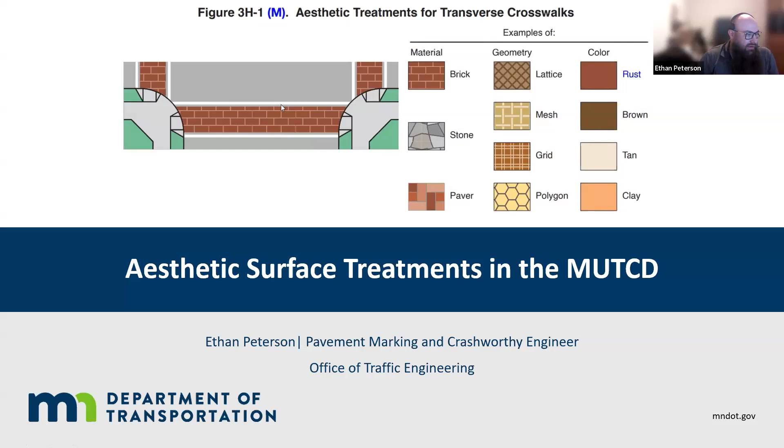So right away, what are the definitions? Before we talk about anything, we should really know what it means, right? So what are the key definitions of the core philosophy here?

Really, the big thing that kicked us all off was colored pavement. Colored pavement kind of brought up this sense of aesthetic surface treatment earlier on, but it is a completely different thing. Colored pavement is a road paving material, paint, or surface treatment used to communicate regulations, warning, or guidance, or that incorporates retroreflectivity. So the key difference here is that it's used as a traffic control device.

And then the aesthetic surface treatment - what are these? These are treatments like brick, pavers, or patterns used for purely aesthetic reasons that are not intended to communicate with road users. So the big thing here is it is not a traffic control device.

The core philosophy, consistent across both the old MUTCD and the new one, is that any color or pattern that functions as a traffic control device must comply with MUTCD standards, and aesthetic surface treatments are allowed only if they do not interfere with, degrade the contrast of, or obscure official traffic control devices. That's a really big theme you'll see as we go here.

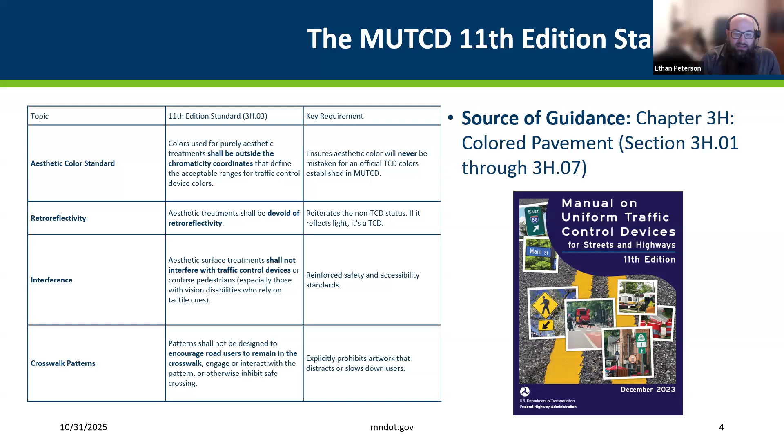So that's kind of the guidelines for that. How do we move forward with all of this? That's the really big thing, right?

As Lisa alluded to, MnDOT is working on a technical memorandum right now to address policy for MnDOT roadways on how aesthetic surface treatments can be used, and defining the process for how that would work. We're aiming to have that finished by early to mid next year. I think we're almost there—we just need to get it through the tech memo process, which could take some time. Hopefully we can get through that quickly, and then get it to this group and disseminate it amongst everything.

I didn't want to bring too much up because there's a lot to it, but I will say it's going to be pretty restrictive. Like this last bullet says, we're not going to allow aesthetic surface treatments on MnDOT roadways in crosswalks. We're really concerned about the interaction with people who have visual disabilities, because contrast is a huge thing for them, and there's a large percentage of the population that suffers from some version of visual disability. So we're driving a research project to look at this more closely, and Nicole Morris will dive into that later.

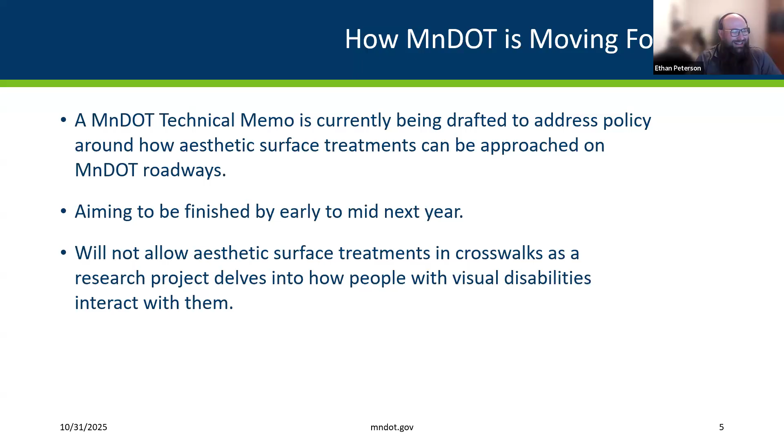So this cues things up for the future, or for these next presentations. And with that, I want to say thank you, and see if anybody has—I think we're going to take questions afterwards if there were quick technical brush-ups.

Seeing, hearing none, I guess I'll give it to Chris.

All right, thank you, Ethan, and thank you for the chance to be here today. Again, my name is Chris Sagsveen. I'm a project director and engineer at SRF Consulting in the safety and research group. A lot of my work involves delving into Local Road Research Board activities.

So today, some of the talking points: I'll give a quick overview of the Local Road Research Board, or LRRB, for those who don't know exactly what it is. Then the project overview of this particular project—there is a report that's done, but not yet published, we're just finalizing that now. For today's purposes, I'm going to focus on the frequently asked questions portion of the report and key themes and takeaways.

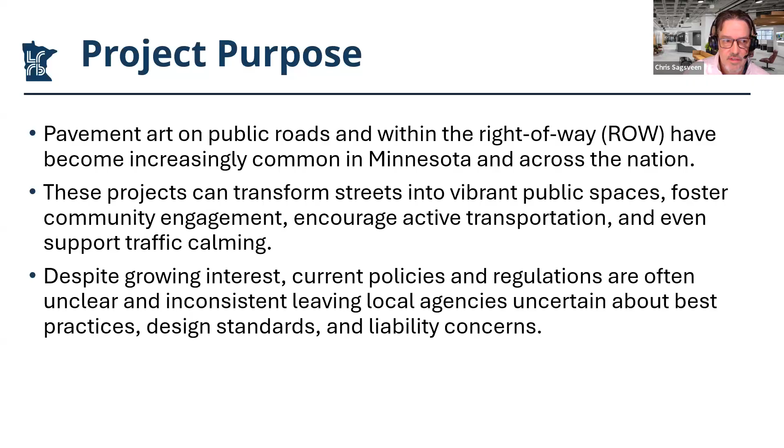To address these gaps in understanding, we assembled a team of experts to help us do the following: we reviewed and synthesized best practices for pavement art in the right-of-way, we analyzed existing policies and technical guidance that we were able to find, such as the MUTCD, we surveyed local agencies across the state and across the nation to see who's doing what, and finally we brought everything together in a report that will probably be ready fairly soon for your view. So today's just about giving an overview of what's in that report.

The technical advisory panel was a pretty good cross section of people across the state here. Randy Newton was the chair from St. Paul, and Ethan Peterson, who you just heard from, and Lisa Austin were both part of the team. We're very thankful for the time they put into helping us address the questions and how we wanted to tackle this.

Let's move into project deliverables. I wanted to touch on the FAQs and the key themes and takeaways. To begin with, what are we talking about? What did this project focus on? It really was about pavement art on public roads, and that was the focus.

Specifically, painted artwork maybe applied by an artist directly to the roadway surfaces, such as within intersections, mid-block areas, and bump outs. The definition for our purposes did not include artwork on vertical elements, such as bridge abutments or retaining walls, or other right-of-way elements outside of the roadway.

Are there state or federal rules or regulations to guide agencies on implementation of art? There are no specific state or federal guidelines or regulations that prohibit pavement art, but there are some important guidelines to consider. First, the MUTCD, which you already heard a little bit about from Ethan, is the main one. It governs traffic control devices such as pavement markings. It does not directly regulate pavement art, but it sets boundaries that agencies must follow. Because it can be interpreted as a traffic control device and needs to conform to MUTCD standards for colors and shapes and so on, it's really important to seek the source and look at that information in Part 3 of the MUTCD.

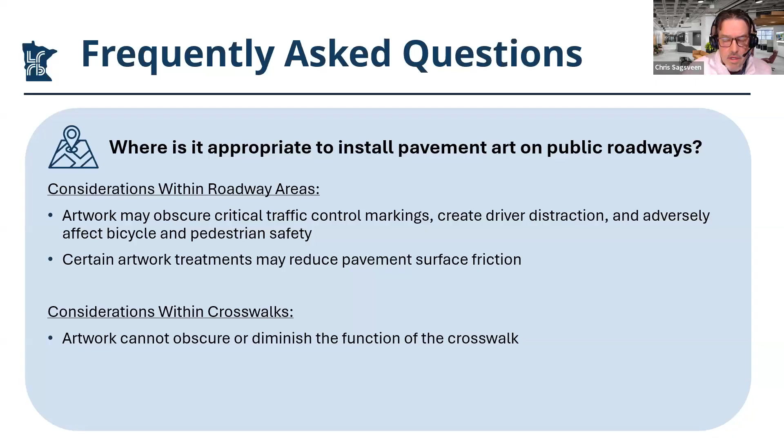How long do pavement art installations last? This is going to depend on whether it's temporary or permanent. There are some examples like Chalk Fest in Maple Grove, Minnesota, which is really only there for a weekend. Others are much more permanent.

What steps should be considered for an agency to implement art in a roadway? In the report, we've provided some common steps or considerations, really considering whether you want to actively participate with organizations installing artwork, or whether you want to regulate it through a permit program. So we give a little bit of a range in there.

And then, are there examples of model policies or programs? We have about 9 examples in our report, across Minnesota and the nation, so you can easily look in there to see how it relates to your condition. With regard to environmental impacts, there's a small section that touches on things we're familiar with, such as paint wash-off and anything that might get into the storm system.

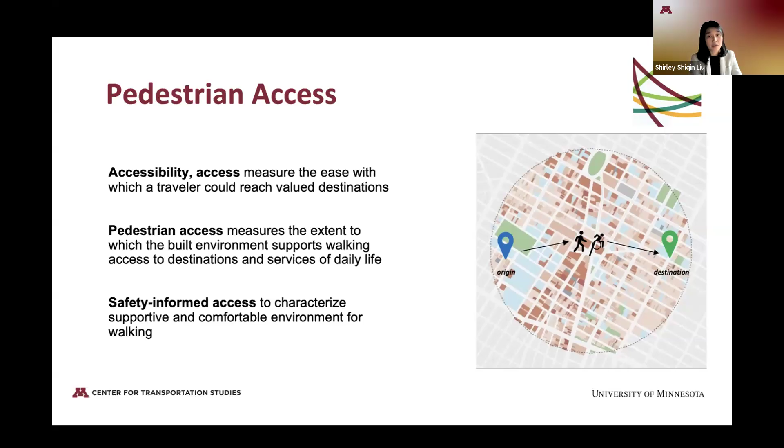It is a broad concept and can mean different things in different contexts. In our work at Accessibility Observatory, we work within the multimodal transport access framework. So it's about how easily people can reach places they value. It can be measured as a form of travel time from origin to destinations. When we focus on walking, we look at pedestrian access, which measures the extent to which the built environment supports walking access to destinations and services of daily life. For example, in Accessibility Observatory we calculate walking access to jobs annually in our National Accessibility Evaluation Project.

This map I'm showing here is the Met Council region profile. Overall, this access measure, in terms of walking access to jobs, can reflect population and economic activity centers, which tend to cluster at the city center. But this map shows we measure walking as if all streets are equally accessible for people to walk on. But we also know this is not true. Not all streets are created equal.

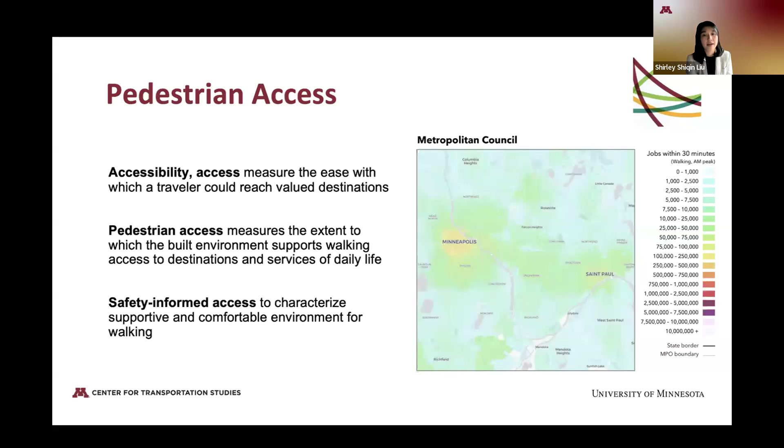So our goal is that we want to take a step forward to do more safety-informed access measurement, to better characterize a supportive and comfortable environment for walking.

To advance this conversation, we land on the concept of level traffic stress, which is a framework for evaluating how comfortable and safe pedestrians and bicyclists feel when traveling along roadways and crossing intersections with existing facilities and traffic conditions. This concept was first developed and studied by an engineering professor to capture the bicycle level traffic stress for cyclists when traveling along streets. It is a pretty mature concept and gained popularity in the last decade for planning communities. In recent years, the concept has been borrowed to describe the level traffic stress for pedestrians, which is our primary focus for today's topic.

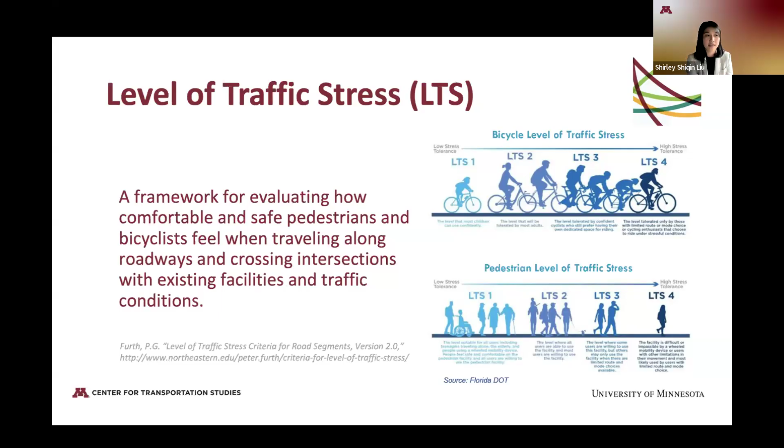So what is pedestrian level traffic stress, or PLTS? It is a simple scoring system from 1 to 4. PLTS 1 represents streets that feel safe and comfortable for everyone, even little kids or older adults, to walk on. But as stress level rises, walking becomes less safe and comfortable, and probably requires more vigilance to surrounding traffic. PLTS 4 is high stress, meaning it is uncomfortable and unsafe for most users, and most people might simply avoid walking altogether.

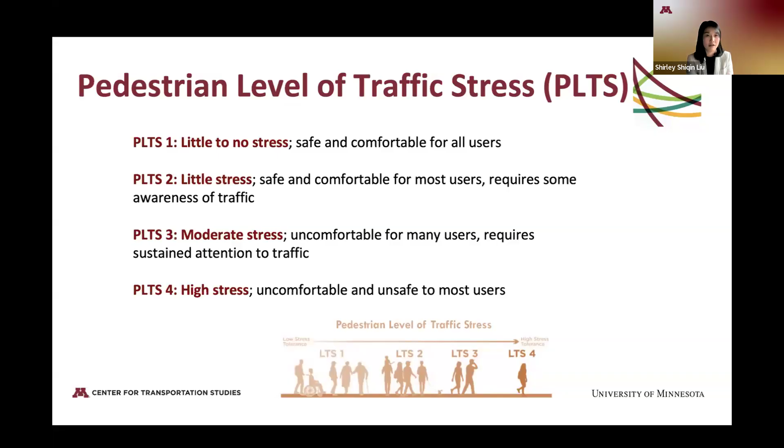So what type of roadway design or feature could impact PLTS? In 2024, the Center for Pedestrian and Bicyclist Safety published a report about a standardized approach to describe pedestrian level traffic stress at the street segments and crossing level.

PLTS is influenced by many street design features and traffic factors. For example, for walking along a street segment, speed, traffic volume, or the presence and width of the sidewalk could matter the most. For crossing experience, it's about the speed, the presence of signals, and other traffic control or calming systems.

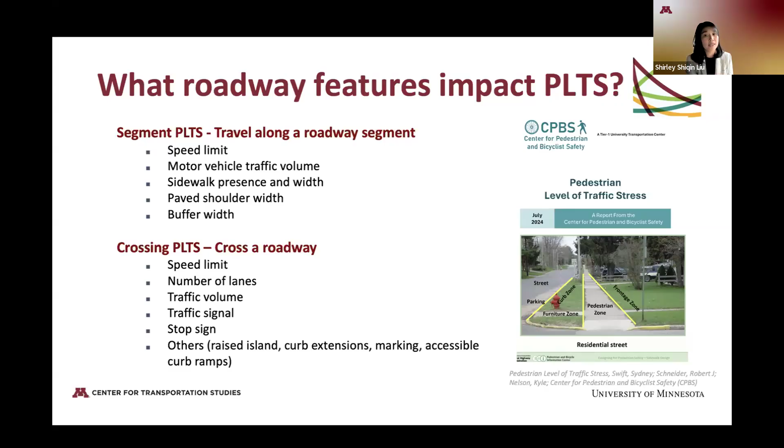Also, how many lanes people are crossing and other safety features like pavement, curb extension, or crossing island, for example. So these are all the details that shape whether a street can make people feel comfortable or intimidating to walk on.

So one key question we face is: do we actually have the data ready to measure pedestrian comfort or stress at this level? The data I mean is all the relevant spatial features or traffic factors that we just talked about that impact the pedestrian experience.

I guess the short answer is no. Throughout our investigation, it's surprisingly rare to find well-maintained or consistent data for pedestrian infrastructure. So even if it exists at the local level, it's on a much smaller scale within the jurisdiction or particular corridors, and the detailed elements we need for describing and capturing the pedestrian experience are not enough.

For example, we simply cannot find any local network data with sidewalk or buffer width attributes, without doing specific field work. Also, for measuring access to destination, which is our work's focus, we need a well-connected street network for routing analysis. These are all important challenges we encounter as we try to quantify stress levels and access evaluations.

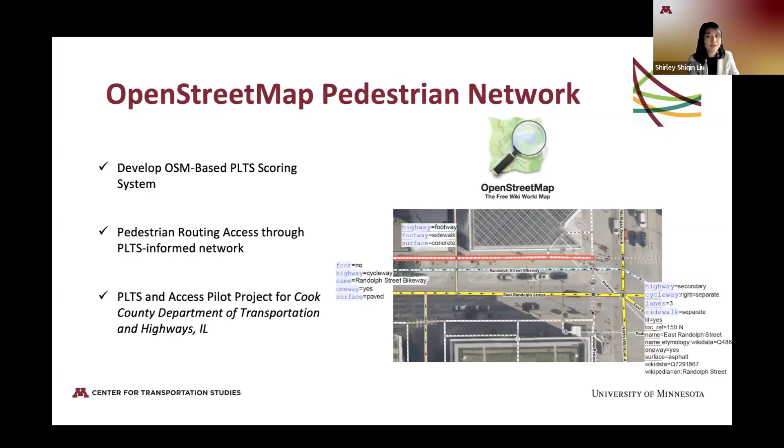So this is a pilot project. We partner with Cook County DOT in Illinois, which is home to the City of Chicago. We are able to show an example of how we can translate this data into a meaningful planning tool to inform pedestrian planning.

So building within the scope of the OpenStreetMap data, we can characterize streets into different stress level profiles. But not every road is suitable for walking, so defining a non-walkable roadway might seem intuitive, but it's actually not as straightforward from the data standpoint.

But for our analysis, for example, we typically exclude roads where pedestrians aren't allowed, like expressways, or roads where access is private or doesn't serve pedestrian routing purposes specifically. This step ensures that our PLTS network only reflects realistic walking routes.

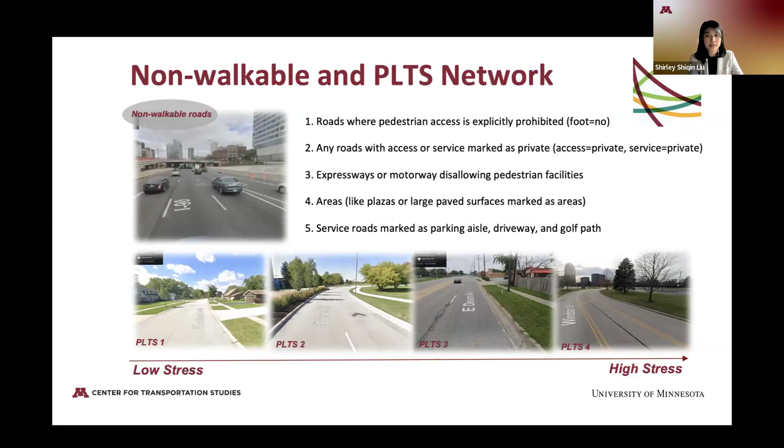In the next couple slides, I'll show a couple examples of street profiles at different stress levels to give you a sense of what they look like. First, for the sidewalk segment: the basic street level features we use to describe PLTS include sidewalk presence, buffer, speed limit, number of lanes, and roadway types.

So let's take a look at an example of what low stress streets look like. First is an example of a typical residential street with sidewalks along low speed roads, which may look like a neighborhood street that you live on. They are typically safe and comfortable to walk on.

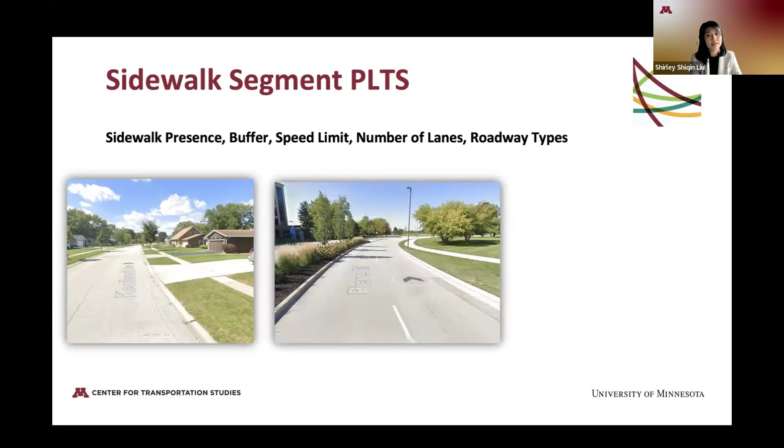The second street here has sidewalks along a relatively low speed and low traffic roadway, which we categorize as low stress, or PLTS level 2, even though it's a little higher speed compared to residential streets.

Another example is a sidewalk segment along a medium speed, 2-lane arterial road. It is not very comfortable for people to walk on, and this type of street we typically categorize as PLTS 3, medium stress.

All three examples reflect the fact that pedestrian experience on sidewalks is highly impacted by the adjacent traffic roadway, and we are able to take those into account when doing this PLTS categorization for streets.

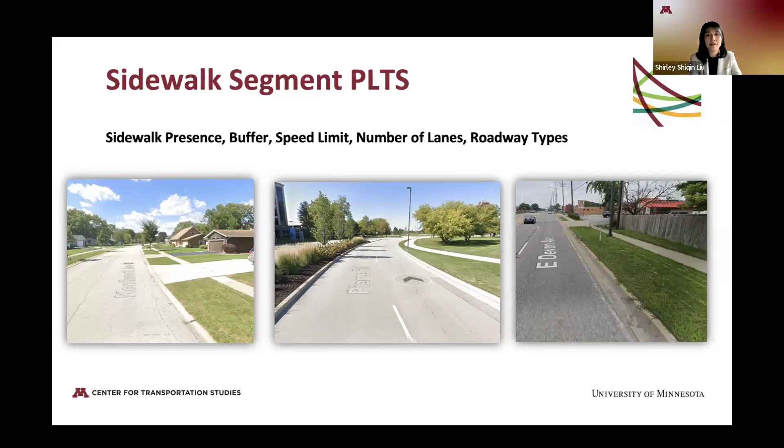Next we're going to look at crossings. The factors we consider for PLTS include any kind of traffic control system, like whether there are traffic signals or stop signs, and traffic calming applications including crossing markings, curbs, islands, or raised crosswalks.

The first example is a pretty intuitive low stress crossing environment: it's on a low stress residential street, with stop signs and really nice crosswalk pavement and markings.

The other example reflects more of a medium stress crossing. It is signalized, but with more than 5 lanes of traffic road.

Note that we have not included pavement or aesthetic art application as an attribute for level of traffic stress, partly because of the data. But as I heard in Ethan's and Chris's presentations, I think a synergy we could explore is where is the good place to install pavement art in a crossing, and how pavement art will interact with existing crossing attributes and PLTS level. Does it make sense to install art at already high stress locations, and will it become a form of distraction, or will it help ease traffic in some areas, or crossings with or without traffic signals?

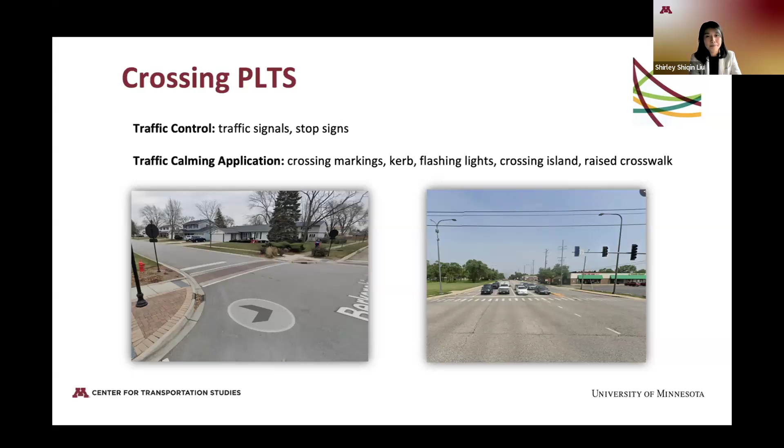Looking back to our big picture, our work is developing a generalizable method, working with relatively consistent data to characterize low and high stress streets for every street network in different places. We developed these methods with support from the Cook County DOT.

This map shows the PLTS network profile for part of the City of Chicago. The green corridors reflect the low stress network, while red highlights the high stress streets. These stress streets can become a barrier for access because people typically reluctant to, or may try to avoid entirely, walking on those high stress streets.

For example, if those corridors or streets are important connections to many essential destinations, then this may become a problem, because many people may have to walk on those stressful streets to get to their destination. Then there would be safety and economic development concerns. This type of analysis will help.

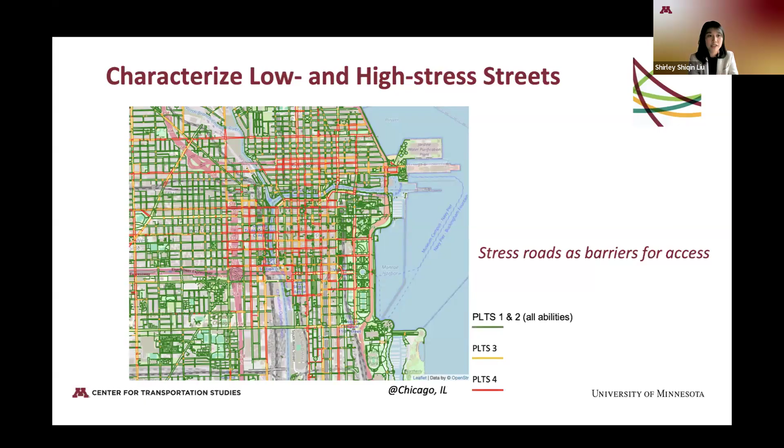Using the PLTS and access framework, the goal of Cook County, our long-term partner, is to be able to use this type of analysis and tool to help identify locations that are high stress and to prioritize infrastructure improvement. It also provides a way to evaluate accessibility before and after interventions.

This measure can fit into performance management for pedestrians, and also link investment in the pedestrian network to broader economic health and safety outcomes for communities.

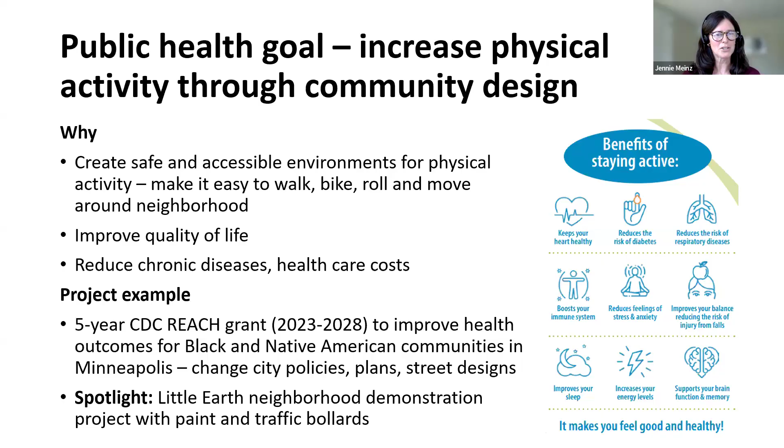The project I'm highlighting today was made possible with funding from the CDC, with the overall goal of increasing physical activity, specifically in the Native American community. I'd put a plug in for anybody on the webinar that if you're looking for partners in this work, please think of public health and our mutual interest.

So to get going on the community engagement for a pavement painting project, here is a summary of the process we went through, and I'll be sharing some tips and lessons in the following slides. I'll walk through each of these steps in detail.

I'll quickly read the steps because I think they were really important to our work. This was a community idea to paint the crosswalk, not the city's idea. We had a multi-year funded relationship with a community organization. We tried to have very frequent touch points monthly over the last 1.5 years. We went through many iterations of crosswalk art design to make sure everybody's guidelines and interests were represented, and then a celebration with some community painting days.

And then the next steps will be the results from a crosswalk study that Dr. Morris will talk about, and some of the next steps in the project.

So I'll spend a little bit of time on the background. One of the successes of making this project happen was that it was a community idea, done through a funded contract or relationship with Little Earth Residents Association.

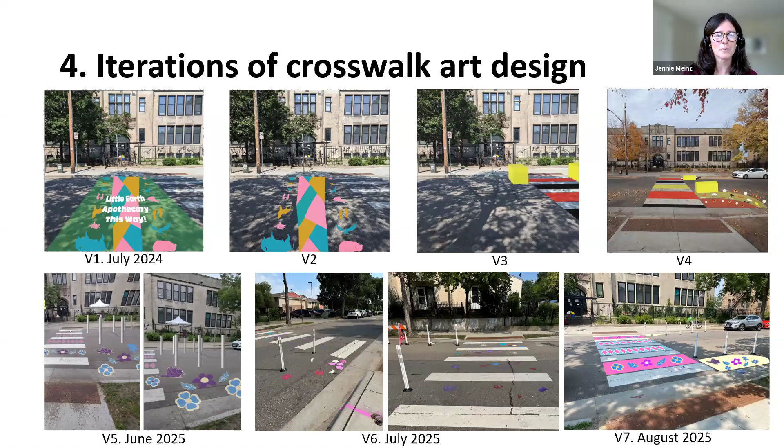We ended up changing it to blue out of concern that it might be confusing or confused with the white continental block. So it takes a while, like longer than you think it's going to take, with Minnesota winters, with the back and forth, but you'll see in a minute the final design, and I think we're really proud of it.

This is just to reiterate that all the partners involved had different priorities, but they all had this intersection of really valuing the safety of the people in the community and the pedestrians. At the end of the day, the community really cared about representation and engagement in the project. The city really cared about the permits, the policies, and the street design guide. And the research team was really concerned with how are we going to study this with people with low vision.

And there we are in process, changing that bollard, or the inside of the bump out, from cream to blue. It was so hot, but I think it was super important for everybody to be there together painting — the researchers, the health department who was coordinating it, myself, and the youth and the leads.

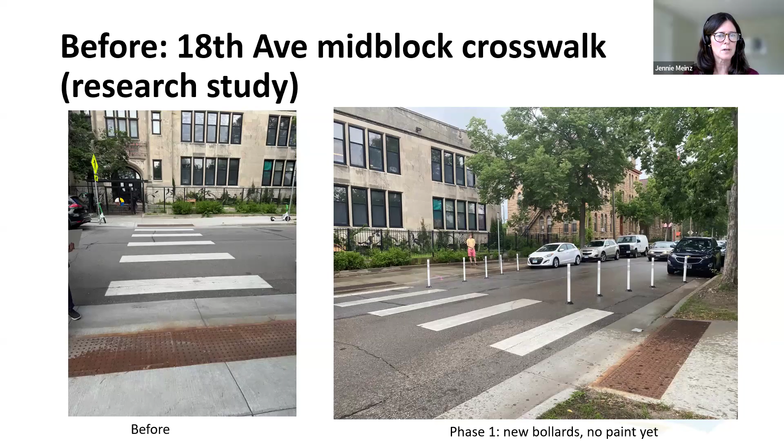After we put in the safety bollards, there was some more data collected about pedestrian and driver behavior before painting. And then here is the final result of the crosswalk with all of the painting and the bollards.

It may be a little bit hard to see, but in some of the blue sections there, that's where those seven grandfather teaching animals are placed. And so the research goes on, and I will end there and hand it over to Nichole.

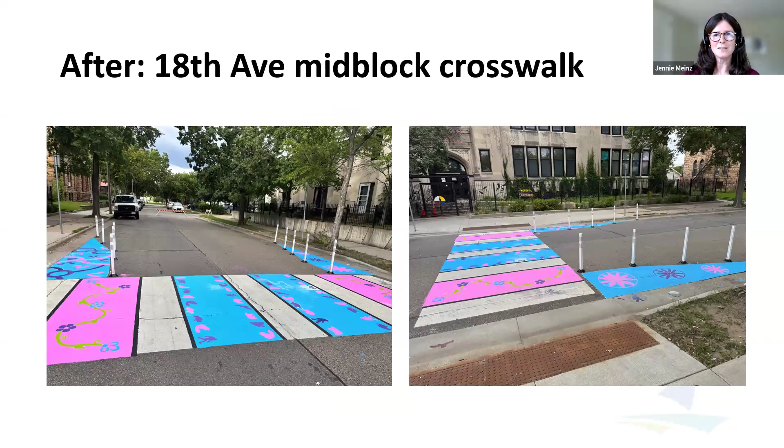If I can, here, stop sharing. So you can see my slide, yes? Yeah, okay, I think you can all see it.

Well, thank you everyone for the opportunity to share what we're doing on the research side. I want to acknowledge my co-PIs on this research study, Dr. Curtis Craig and Dr. Gordon Legge. Gordon is a professor in the Department of Psychology and is a world-renowned researcher in low vision wayfinding research. So we were really excited to have him agree to work with us on this study.

I'm going to go over a few things that Ethan discussed, but hopefully this will help solidify some of the things that he had mentioned.

Previously, the decorative crossings have not been supported under FHWA. The concern was that they are devoid of retroreflective properties. They diminish the efficacy of the transverse markings, degrade contrast. There's concern about distraction and lack of uniformity. Of course, the U in the MUTCD is uniformity, right? So we really want uniform traffic control devices, and with the art, we really lose a lot of uniformity.

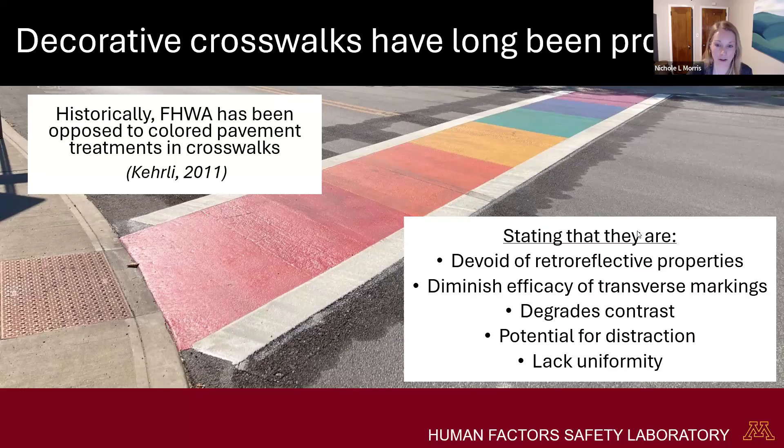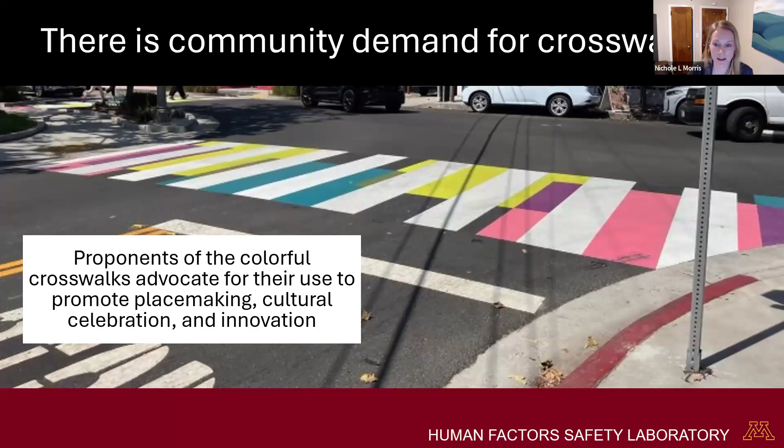But of course, there's been a lot of demand for these colorful crosswalk art treatments for all the reasons that have been mentioned previously, and this has been putting a lot of pressure. Ultimately, many communities have been moving forward without the support of FHWA and without proper guidance under the MUTCD because there's such demand. This has allowed us opportunities to actually study crosswalk art, because there have been so many implementations done outside of the guidance, leading up to this latest version of the MUTCD.

So leading from all of that work, FHWA then provided new guidance under MUTCD 11th edition. Essentially, they have said yes, you can use aesthetic surface treatments, but they want these in between transverse lines. As you're going to see, this is a real challenge for communities like Minneapolis, who pretty much exclusively use continental style markings. Being within compliance really requires either milling those things up or immediately being outside of compliance, or the guidance I should say.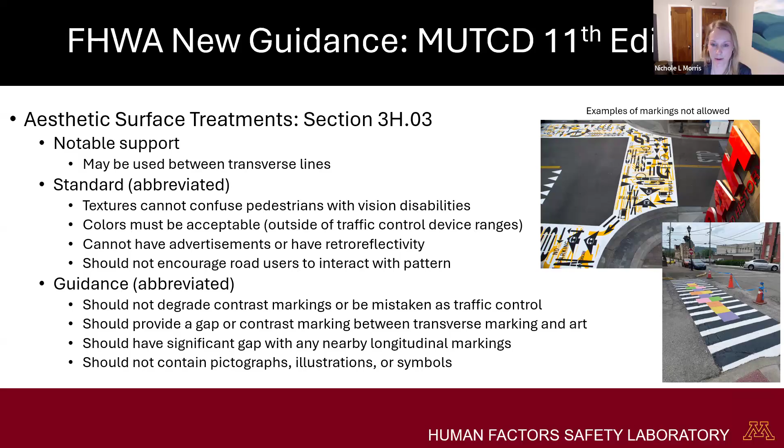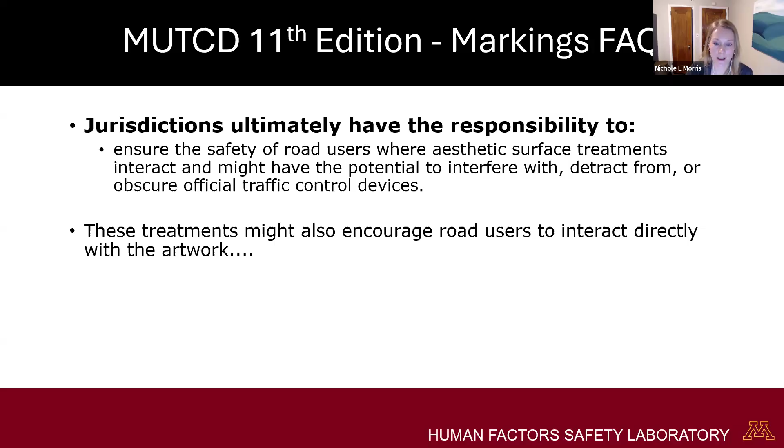So the final thing in some of the FAQ is that jurisdictions have the responsibility to be ensuring that aesthetic surface treatments are safe. They're not interfering with, distracting from, or obscuring any traffic control devices. And they want to make sure that these treatments also encourage road users not to interact with the treatments. So if an agency does decide to pursue artistic surface applications, there is guidance that they really need to be ensuring that those with disabilities don't have any issue interacting with that.

So that really leads to the research study with my research lab and Minnesota DOT: what are the risks to pedestrians with visual disabilities? One of the challenges is there's actually not a lot of research on crosswalk markings in general. So you would assume we already know whether transverse or continental style marking is better, but there's actually not a lot of research on that. So that's a challenge to know if this guidance of putting the art in between the transverse lines is better because transverse lines are better. That's actually not very well studied.

So that's sort of one of our first questions: does transverse or continental style markings with incorporated art better support pedestrians with visual impairment? Additionally, if you have low vision, contrast of lines and the thickness of lines - as we're thinking about frequency and contrast, the thickness of the lines may be very important, but that also isn't well studied. And what characteristics of the art may support or impair safe crossings.

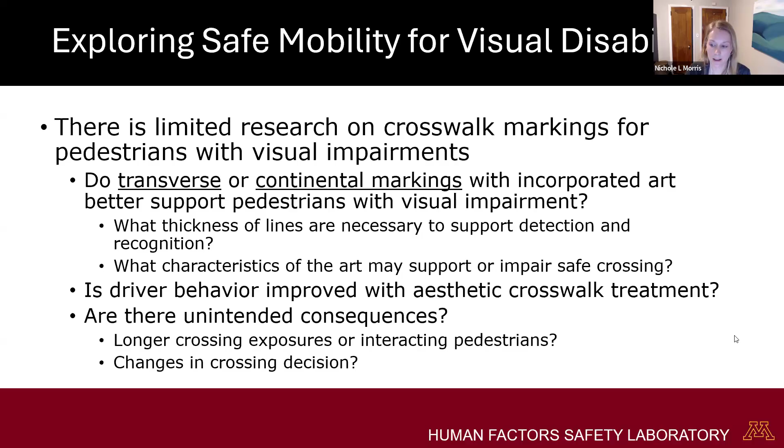To some of the concerns about driver distraction, unsafe interactions of drivers and pedestrians if drivers are distracted by the crosswalk art, we want to look at that as well. And then finally, any unintended consequences - of course, again, we don't want people spending more time in the crosswalk interacting with the art. Does it change any of their decision making? One of the challenges of pedestrians feeling more supported by infrastructure is sometimes they will become riskier in terms of walking out into a crosswalk before drivers are fully yielding.

So I wanted to note a couple of things here about visual impairment. The first is visual impairment is really not a single type of condition. There are many different types of conditions that can lead to visual impairment. This becomes a real challenge as we're trying to look at pedestrians with visual impairment - there's not just one type, there's a whole gradation of different diseases, different levels of impairment that really may influence performance. So as we're thinking about this, there's a couple of important things to note, such as the range of your visual angle - we have the greatest amount of detail in our vision in our central vision.

We call this our fovea. We have a lot of color perception and detail there, and that's where we have our greatest acuity. As you get further out into the periphery of your vision, you have a natural loss of acuity. Even with full vision, you're going to have low acuity in your peripheral vision. This becomes a challenge if you have central vision loss, because you've lost the part of your visual field with the greatest detail, and you're having to rely on parts of your vision that are lacking in receptors and cortical reception. So there are a lot of challenges there.

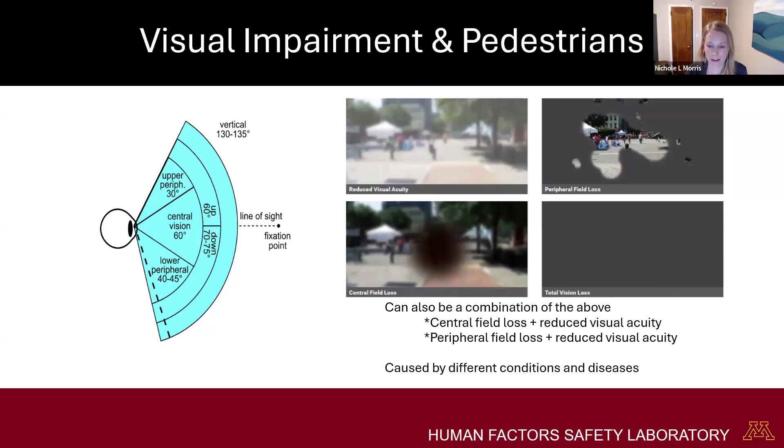For those with visual impairment, whether very low vision or legally blind, there's a procedure they're trained to adapt in order to cross crosswalks. The first goal is locating the crosswalk. This is a concern: are there confusion points about what is a crosswalk and where it is, especially if the crosswalk has been modified in a way that makes detection difficult for someone with low vision?

The next step is aligning themselves to the crosswalk, and this is where tactile surfaces become very important to help with alignment. Then they need to make the final decision to cross, and maintain alignment while crossing. Modifying the visual characteristics of the crosswalk could be quite detrimental to maintaining proper alignment as they cross. These are some of the concerns we have.

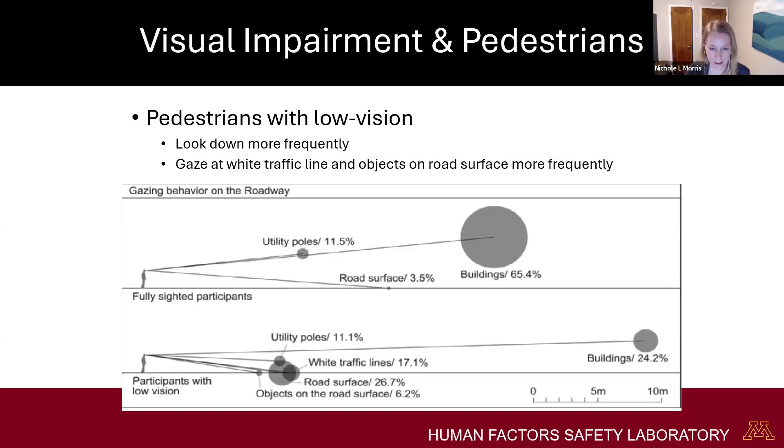Another thing to consider is where pedestrians look as they cross a roadway. Pedestrians with full, normal vision spend very little time looking at the road surface—we can determine this through eye tracking studies, affixing pedestrians with eye trackers and seeing where they spend their time. They look more up and around, thinking about their destination, versus someone with low vision, who spends far more time looking at the road surface and the lines to assist them, and far less time looking around.

A big consideration with crosswalk art is that surface level changes are a major concern for pedestrians with low vision or blind pedestrians. The reason is that different contrast changes can indicate a curb or a crack that's a tripping hazard, a toe stubber. With age-related macular degeneration, the most common type of visual impairment among low vision pedestrians, you often see other comorbidities like mobility challenges, where tripping becomes a real risk. They pay special attention to cues in the surface for tripping hazards and cues in contrast to help keep their orientation while crossing. So we have to be careful not to artificially confuse a pedestrian into thinking there's a surface change, or to occlude the fact that there actually is one, such as at a curb or a crack.

Dr. Curtis Craig worked hard synthesizing all of this. To recap, FHWA has some concerns about aesthetic crosswalk treatments—the idea that they may distract drivers as they operate their vehicle, or distract approaching drivers if a pedestrian is standing there, making them pay more attention to the art than the pedestrian, and that the pedestrian might be distracted or cross in a maladaptive way. But looking at the literature, we do see genuine concerns for pedestrians with low vision. We want to make sure their crossing patterns aren't hindered or made worse, since they're already slower to decide to cross and complete crossings than a pedestrian with normal vision.

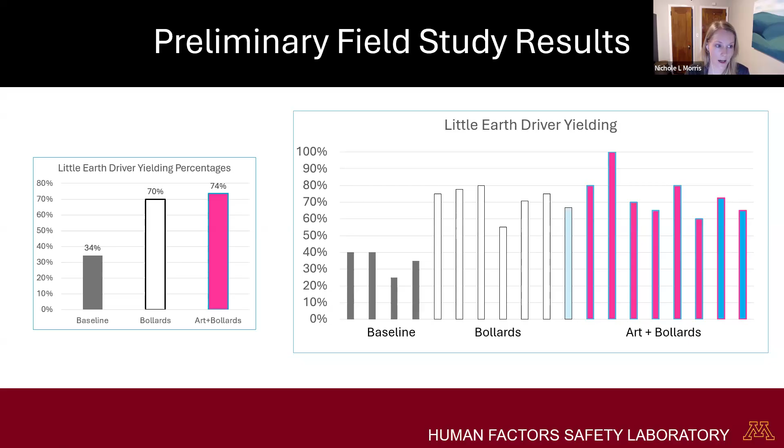We see the opposite. So we're looking at driver behavior between natural pedestrians. One challenge is that because it's a mid-block crossing, not between two signalized intersections, pedestrians do not need to use this crosswalk. There's nothing illegal about crossing outside of it, and we do see quite a few pedestrians crossing outside.

So we're looking at their usage, time to cross, their exposure, and we're also seeing quite a bit of wrong-way driving. This is a one-way street, so we're looking at any potential changes there.

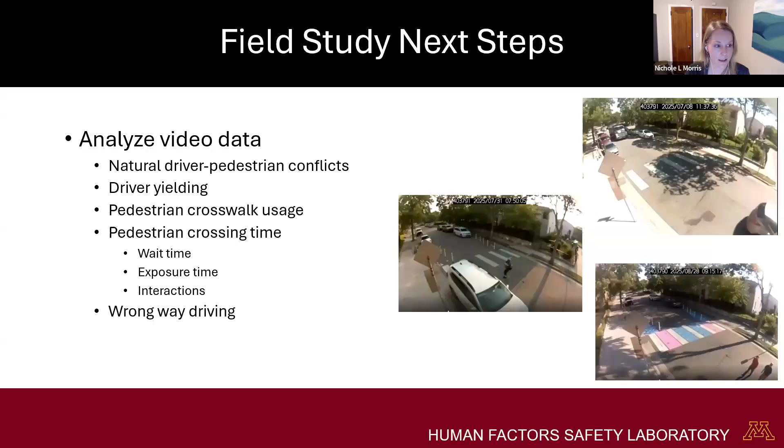We'll be doing an online simulated study. We can use some software from a researcher at Johns Hopkins who was previously Gordon Legge's graduate student, so we can modify a lot of these different factors and the imagery to simulate different types of visual impairment.

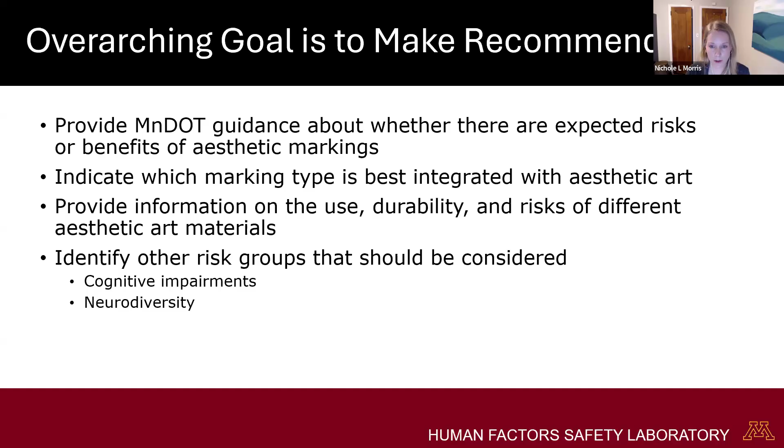Our overarching goal as we work through this series of experiments is to provide guidance about the expected risk of aesthetic markings, guidance about the best approaches, and some general information about where we think research should look next regarding aesthetic crosswalk art.

So that's the end of my talk. I'm happy to turn this back over for some discussion.

Paul's going to lead us through the Q&A, but I just wanted to say what a well-rounded presentation, right? A little bit for everybody. We got the technical stuff, the community benefits, some level of research work, and then this final research piece. It's just a really great set of presentations. So with that, Paul, why don't you lead us in some Q&A?

We've got just a couple minutes, but we have a few good questions lined up. Thanks, yeah, very good. Well, thank you all to our presenters here. Excellent job today, really appreciate the input on that.

I'm going to jump to the last question, from Eric here, and I think the group can read that. The question is: if the understanding is that the art on the pavement slows vehicles down, could we consider that a traffic control device? I guess, Ethan, maybe I'd call on you here—is this something where we'd want to reflect on a technical definition of a traffic control device?

I don't know, anything you care to say about that? I mean, that's a good question. I don't quite know how to answer it.

In the sense of uniformity, I think that's kind of what this is revolving around, making sure that things are clear, that our traffic control devices follow a sense of uniformity. Even in the first question with the Sean Duffy memo, I think he was trying to call to a sense of uniformity and making sure these things are following the new MUTCD, just because there are a lot of designs out there that don't quite meet that. Navigating that is pretty tough, and as we put together our tech memo we're noticing that, but I think it'll be doable.